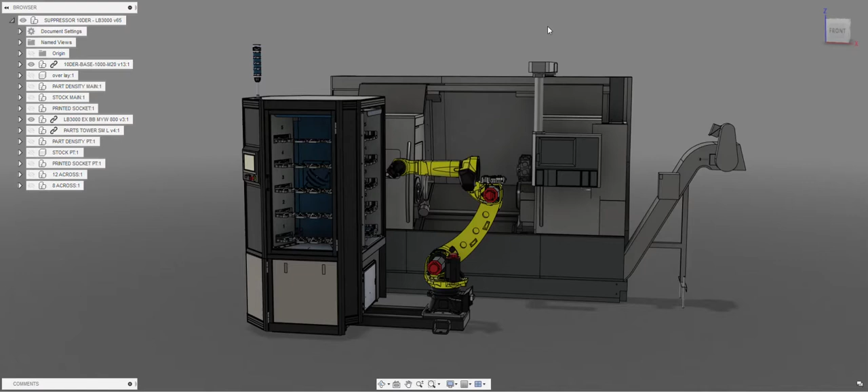Here we see our 10DER base with the milling shelves in front of an Okuma LB3000. This one has the 800 millimeter bed, but again, in this configuration, it's not going to help us much on the lathe. So we are going to remove the shelving system, and replace that shelving system with a sheet metal layout designed to accept 3D printed sockets. We chose 3D printed because they're fairly affordable and they have very minimal design restrictions.

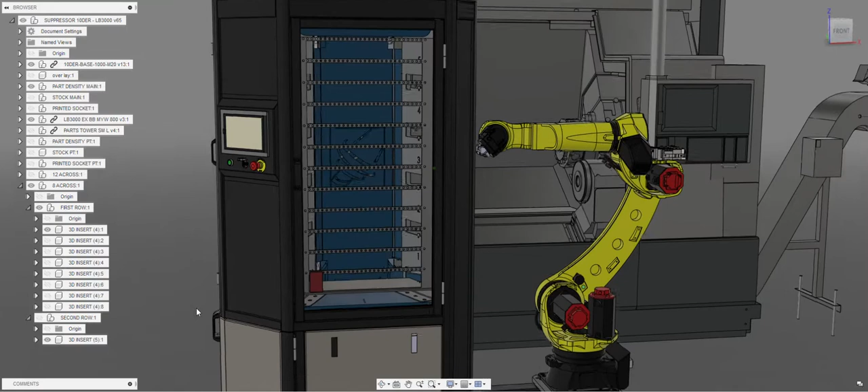So here we can see one of these 3D printed sockets, and of course they go 8 across in this size, and then we can go 12 across as a second option. So here we have a 2.5-inch on center. Largest part for this would be obviously under 2.5 inches, probably 2.4, 2 3/8, somewhere around there. We'll say roughly 2 3/8. Our offset on the 12s is 1.6, so we would probably limit this to about 1.5 inches, maybe a little

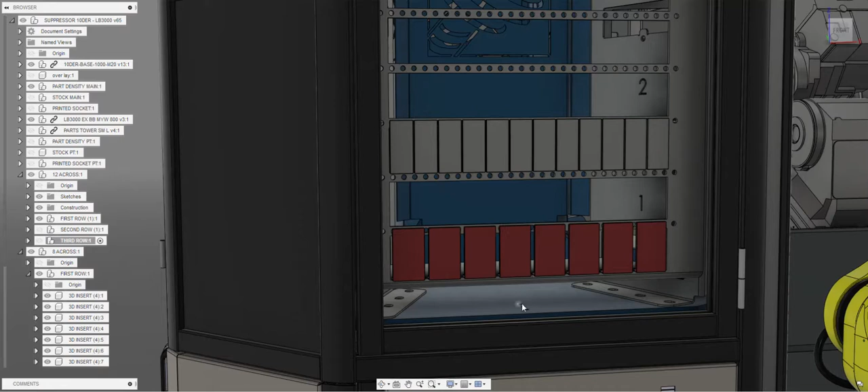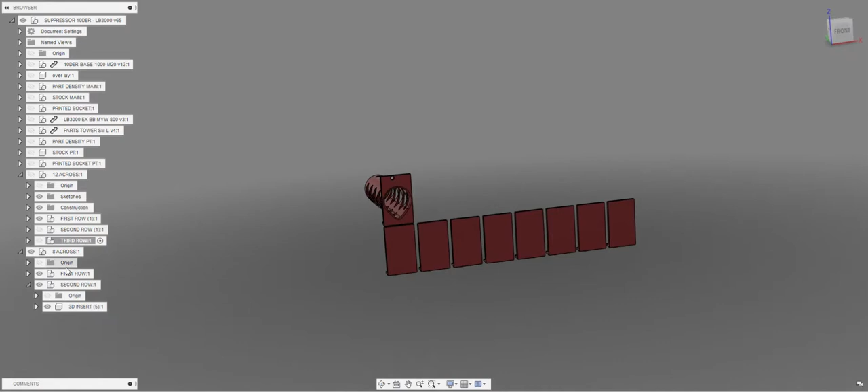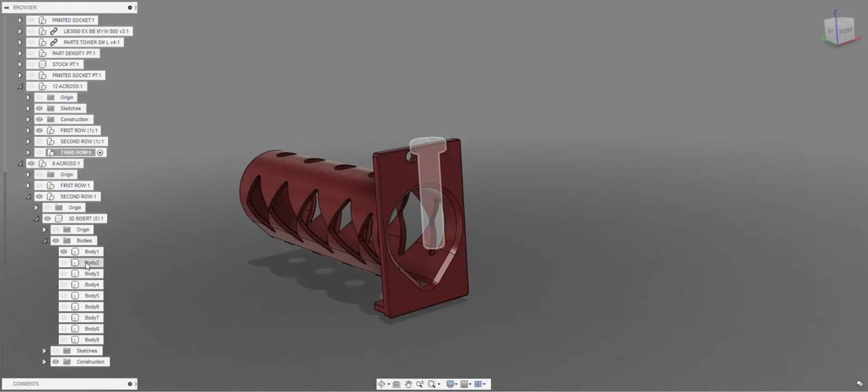under 1.5 inches diameter. Looking further into this design, I'm going to go ahead and turn off the 10DER and our sheet metal and the beautiful LB and our 12. Let's go ahead and talk more about the second row here. So this would be an example of a printed socket. Your stock can go inside. And again, we have 8 across. Well, at least we should. Second row. So we have 8 across.

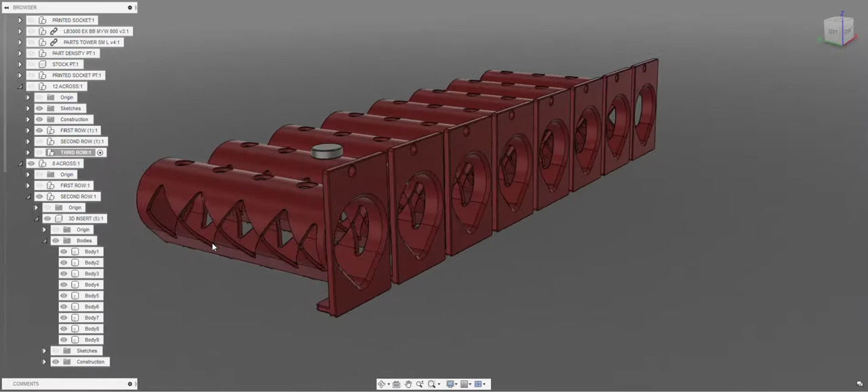And then in this one, we see I put some holes in here. Most of this is concept based, but maybe we just use a 1/2-13 socket head cap screw. They're fairly affordable, maybe a 1/4 inch, whatever. But you can put a feature into your tube to allow different lengths of parts utilizing that same 3D printed tube. Go ahead and turn that on because I like seeing stuff.

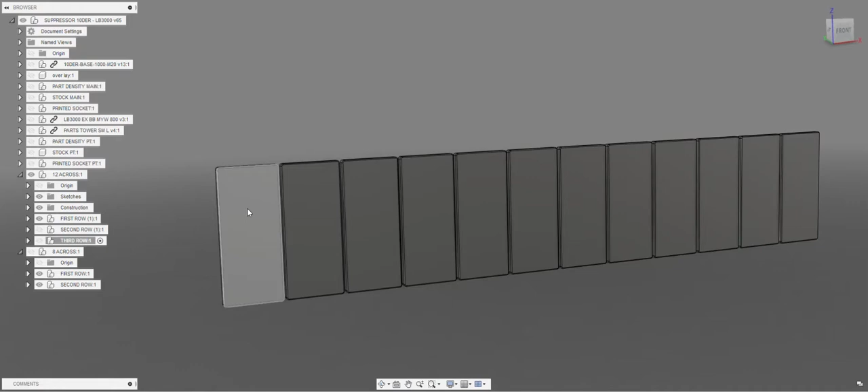Okay, so then we can move on to our smaller 12 offset parts. Again, looking at about a 1.5 inch part diameter difference here. If we were to look at some kind of extruded face, this teardrop feature allows the tube to settle into a repeatable position, and then also allows the robot room to pick up and pull out, and move into the lathe.

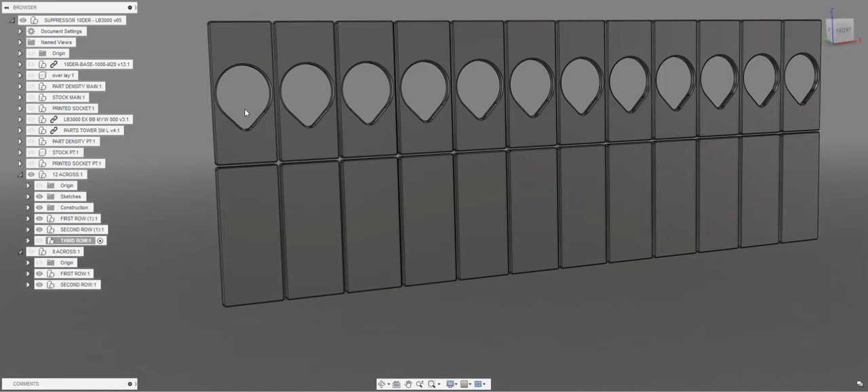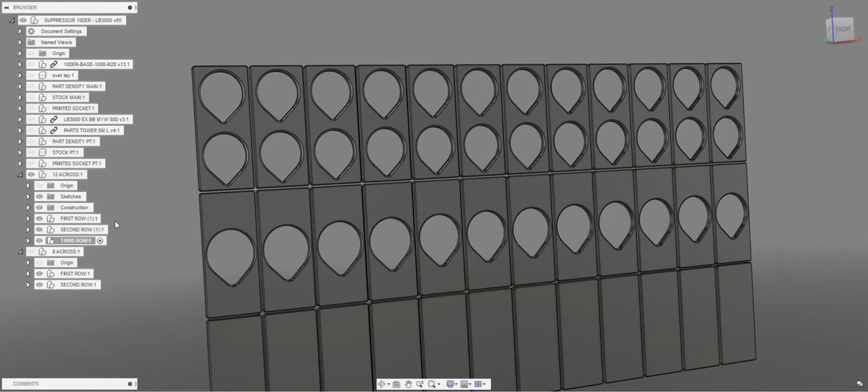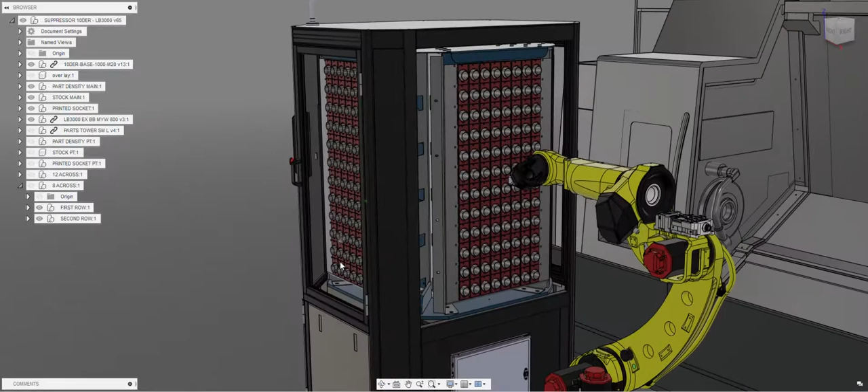So moving on here to an example. We're going to use the 8 position. We have a 1 5/8 round stock, 7.5 inches long. We've got it in a 3D printed socket. We're going to put it in front of our LB3000. And here in this configuration, you can see we have 96 parts on this face. We have 4 faces. So in this configuration, we have 384 parts in the tender base, ready to be loaded in and out of the

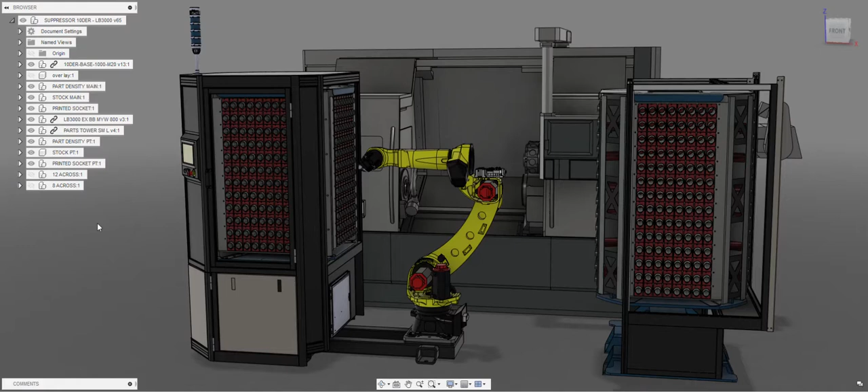LB3000. Then if you need more part density, we can add an additional tower. This tower has 14 vertical options instead of 12. This is 12 high by 8 or 12 wide. So we have 14. We go to the parts tower because it is a taller part. Add those printed sockets and some stock. And now, again, 8 times 14 is 112 parts per face, 4 faces. So that's 448 parts in the queue just off of the parts tower.

And if we want to do some quick math here, 448 plus the 384, it's going to be 832 parts in front of this LB3000. Now this example assumes a low mix, high volume, but the second best thing about the tender is that we actually focus on high mix, low volume, and we do that by dividing each face up. And so here you actually have 8 faces that can hold 8 different parts, and controlling that program can be done with some simple logic at the machine.

The end of arm tooling is not modeled in this configuration, but we do have dual grippers on the end of arm that allows for rough stock to be loaded, and then if you've turned off that face, we have that second gripper to pick up the turned face. The other thing it allows us to do, even if we can grab the rough stock and the finished turned stock with the same gripper, we'll have a rough stock part in the robot's hand, go in, grab the finished part, and switch out the parts without having to come back and forth to the tender or the parts tower during that cycle time. We also have part blow off capability. See if I forget anything off my checklist here.